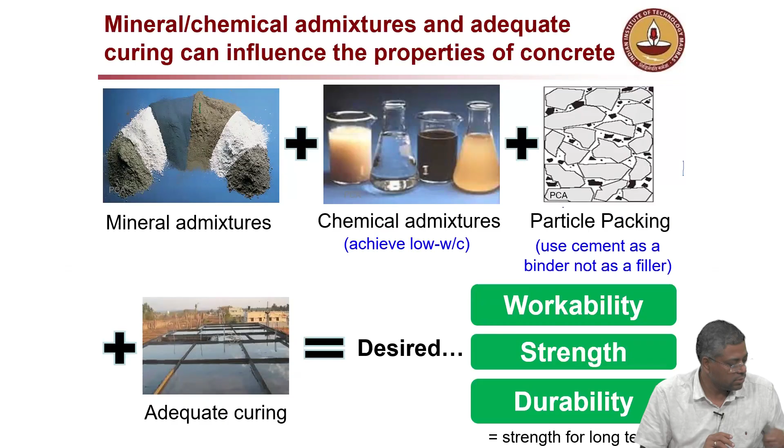If you don't put that much, it will not really show the benefit. I was thinking the sign might be reverse, but no - minimum 25% for fly ash, and if it is slag, minimum 40%. If somebody comes up with a mix with 10% fly ash, please don't call it fly ash concrete - it's too little a quantity to see the benefit.

No, because that also will depend on the amount of water you use, not only the powder material. What I mean to say is, I can have a very high strength concrete - not high performance, just high strength concrete - with less fly ash, if you're thinking only about strength.

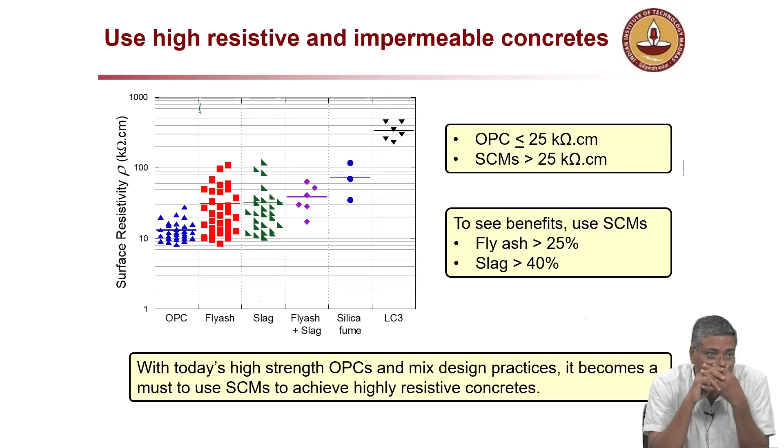So if you put too much fly ash, there are systems with high volume fly ash - 90% and all that - but then you need to properly cure it. A lot of additional effort is required to achieve the real behavior.

For all practical purposes, I would say go with somewhere in the second box on the right side. If you follow that, you will really get good quality concrete. That is one step, then the next step.

Yeah, the fly ash or slag - that is the cementitious content we are talking about. In the code they say cementitious, right? So that is essentially these kind of SCMs.

Now the advantage of this - you remember the service life chart we showed, time versus the damage level? Do any of you remember? Let's look back into that slide - can you open it in the hostel or here? You have it?

You can see here the blue one is the OPC concrete, red is the fly ash. If you can't see things in color on your printout, use your pen and write, or later on you won't understand. The black one, let's forget about for this lecture, but it is also a very good quality cement which is still in research state.

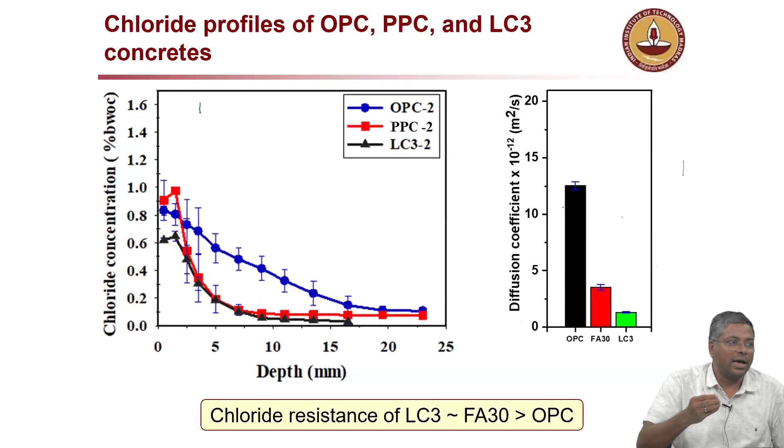What does it mean? When you talk about fly ash or slag systems, over a period of time you can really have high strength and better durability parameters. It may not show up, or it may not show that good properties in 28 days. What it means is, when you cook sambar, you have to wait until the dish is done before you taste and rate it.

I don't know, did I connect to you? You understood? Before the dish is fully cooked, you cannot taste it and say it is bad. You have to wait.

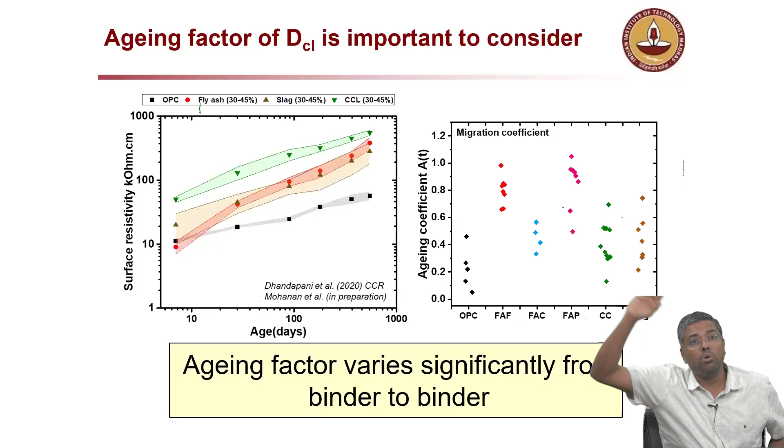Now I'm going to show you an example where, because these are all the actual numbers we got through experiments in the lab, we can use these numbers for a real example. If you have a project and want to show somebody something, you can use these numbers to get approximate values. It's not like saying the steel is going to corrode in exactly 98 years, 5 months and 6 hours - no, but at least you will know it's 90 plus.

That is enough to make decisions. If somebody says material combination A takes 90 years and the other one 89 years, I'll probably go with the second one, if it is less costly. So techno-commercial aspects, both you have to look at, not only technical and not only commercial. Only technical we consider when we don't worry about money. Most of the time we have to worry about money.

So here you can see cover depth is one parameter, diffusion coefficient, which is the speed by which chlorides penetrate. For different types of concretes, you get different numbers. Then the boundary condition, which is chloride threshold, how much chloride you need for the steel to start corroding.

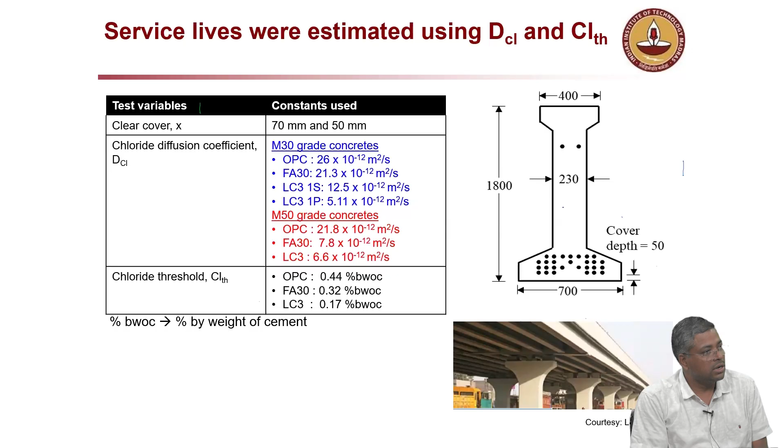So OPC, for God's sake, after this course, if you can avoid OPC, please do. You might say contractual agreement, this thing, that thing, and all that. But if you really want to build durable structures, please avoid 100% OPC, especially for water-related structures. You really need very compact concrete so that water doesn't get in.

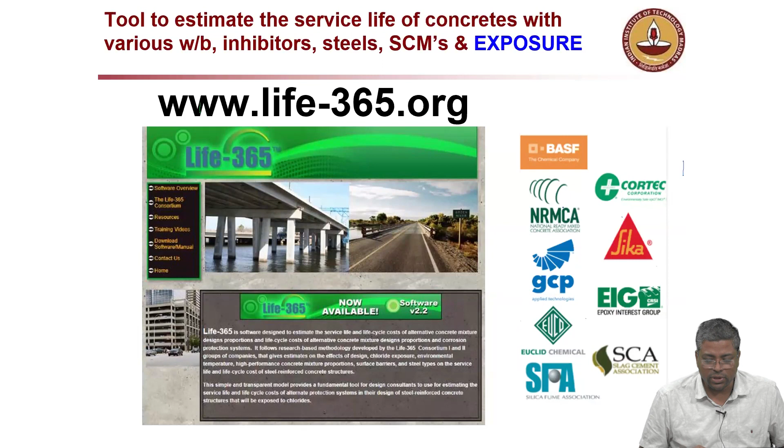Now similar graphs are there for other cases based on this - this is not in your printed slide, I think. So there is also software available, Life 365, free software. You can write it down. You can actually play with different types of mixes, and it's not very complicated, very easy to play with. You can select different types of material - all this can be done in the software. You can just tell what is my mix design, and it will pick its own values. And if you want to put your own, user defined parameters, that's also possible.

And that will also give you probabilistic curves showing what will be the time to corrosion initiation, etc.

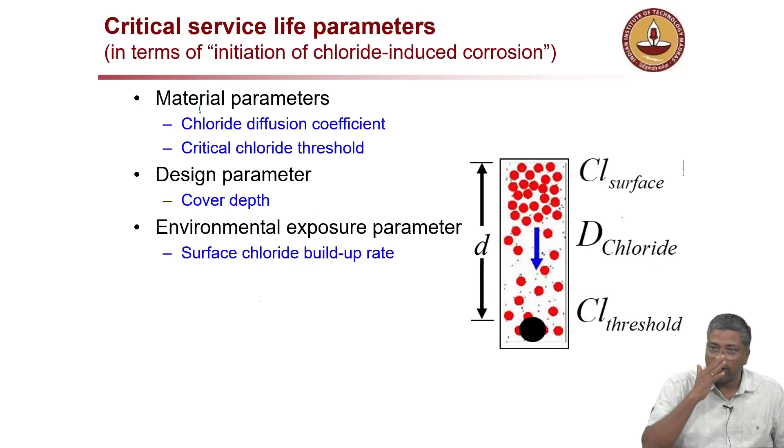This much it has changed for a very small change in X value. Is this clear? I don't want to just keep moving if it's not clear. Is it clear?

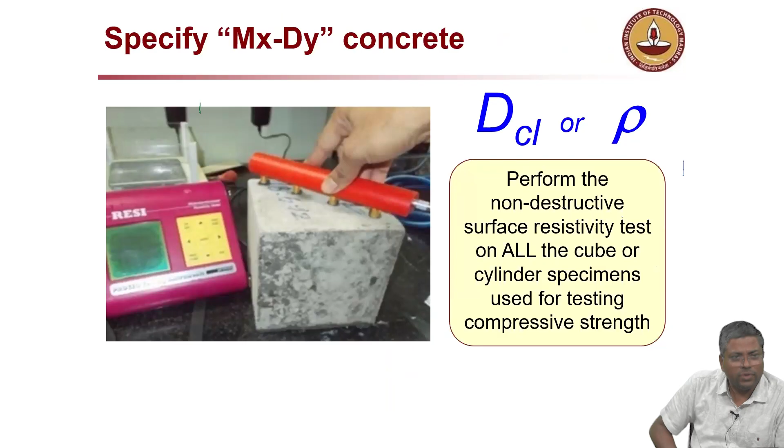Now at the site, you have to really worry about it—how do we achieve that wet condition? So we are saying, like, spray water and keep it wet for 30 minutes or so. That also depends on the type of concrete. If it's very impermeable concrete, 30 minutes may not be enough. If it's porous concrete, 30 minutes is enough. So there are a lot of things—it's not very simple, but we have to define the condition.

Measurement on dry concrete will not help—you will get a very high value, but that's not what we really want. When does corrosion happen? When the concrete is wet or when the concrete is dry?

Who said dry? When the concrete is wet or when the concrete is dry? I'm talking about the moisture condition at the steel surface. You need moisture, right? In the cathodic reaction, one of the reactants is moisture. So if it is very dry, you will not have to worry about corrosion.

So when you talk about all this quality control, what we need is very high resistivity when the concrete is wet, not when the concrete is dry. That's what I want to ensure by doing the testing. So wet resistivity is more important than the dry resistivity.

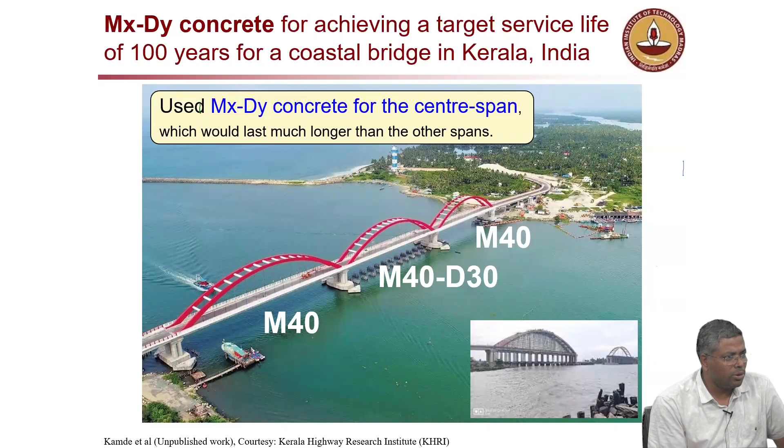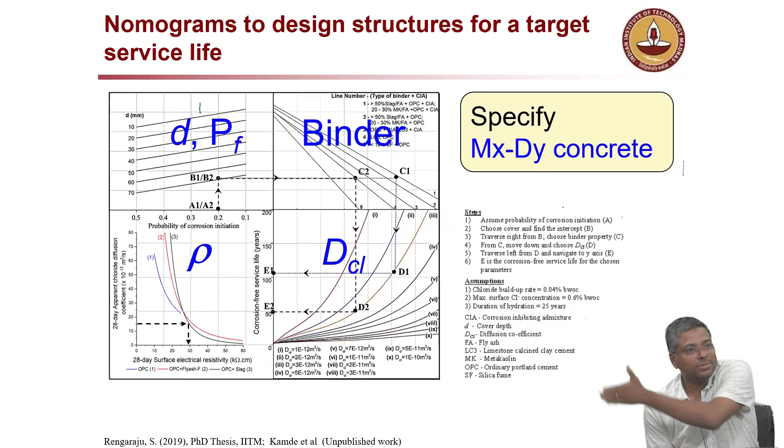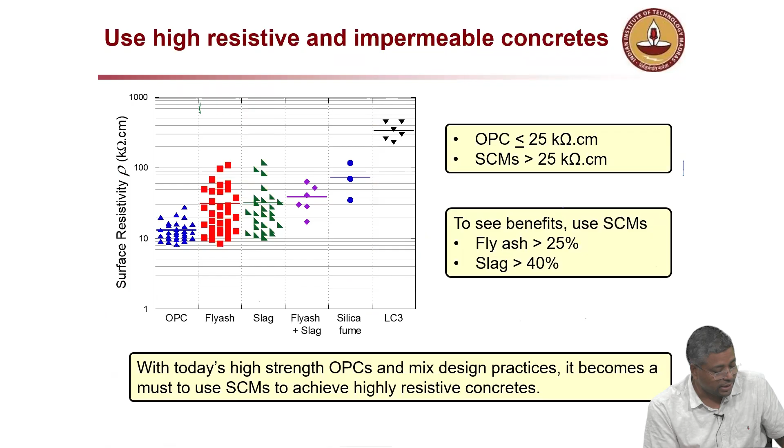But the other two, very, very high resistivity is possible. This one, the blue one, there's only one point which is about 20. That curve, some of the data is from this plot. This is like 5-6 year old data, but the curve is recent.

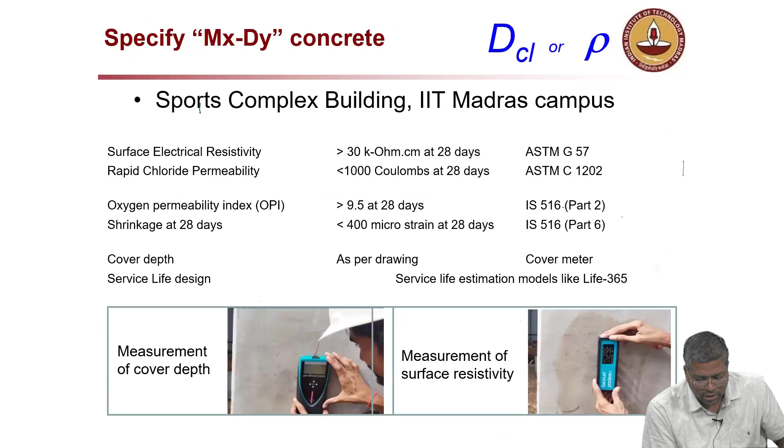Anyway, we have very good evidence that this is how we should do things. Now here again you can see the M40 design. The blue-green one is the M40 D30 design. So look carefully at the mix design, OPC1 and OPC2.

I'm going through this in detail so that you won't forget. OPC1, OPC2 - how much is the cement content? People from the field, have you seen mixes like this? Nowadays we see a lot of mixes with very high cement content.

Sorry, I have this animation and it's going back and forth. See, when they were doing this, I said we are not going to allow anything. In the beginning I said try with 390, that's okay, but not 400. But then we insisted, and still at least we could do this with 409. That's the PSC mix, 410 we can say. So it is doable, that's what I'm telling you.

And I'm not talking about a classroom project. This real bridge, on this bridge, the cement used was 410 PSC. So you have to actually use admixture technology well. Most cases we are not using it. You have to do mix design properly. PSC is Portland slag cement, 70% slag.

Yeah, it's a pre-blended mix. So if it's either PPC or PSC pre-blended, the company will try to maximize the amount of slag or fly ash. The point I'm trying to make is that you don't need 600 kg cement, you don't need 500 kg cement, 400 is enough. The trick is to have the aggregate gradation properly done and use adequate chemical admixtures.

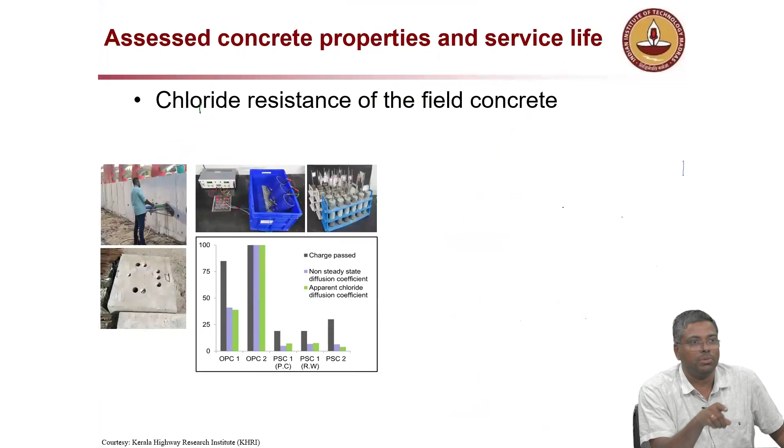That's where the trick is. And you have to do it at the site with your kind of aggregates, your kind of cement, your kind of admixtures - compatibility between cement and admixtures, all that has to be looked at. Is it clear? Now, we also did testing on site, because usually people say, okay this is our laboratory study, site is different. We did actual testing on site. This is proof.

So actually I wanted to test these slab panels for 2-3 years. But unfortunately, the minister came and they dumped this thing into the ocean - this panel - because they wanted to clear up the site. Literally, they dumped it into the ocean. Big loss, I would say. Anyway, so here you can see what is the service life difference between OPC and PSC.

How many times? 4 times. So I really wonder why we don't use it.

You can get better strength, you can get better durability, but still we go by pure vegetarian restaurant, pure OPC. So please use this data wherever you want.

The paper was published last week. It's available online, or I can email it. It's available now, online. Full details of this project are there, because people always ask, where is the field data?

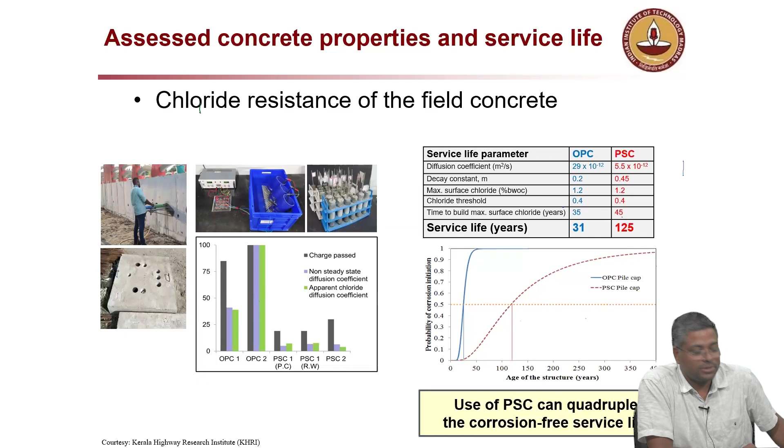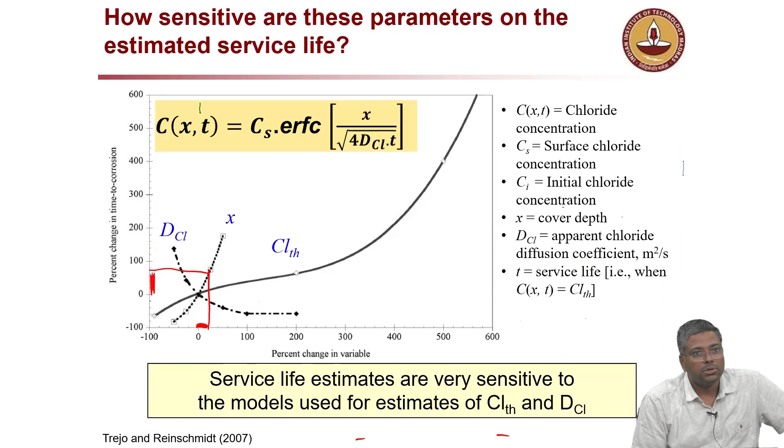So in this equation here, X is the cover depth, and that's the most sensitive parameter. So if I increase it... but I cannot keep on increasing cover, you know why? Because it will start cracking. I don't want to do that, but at least I should provide what is allowed.

So I think you should start penalizing people if the cover is not adequately provided. And usually there is resistance to measuring cover after the formwork is removed. Do we measure cover depth? Unless there is a problem, we don't.

Why? You don't want to know. It's sometimes better not to know the problems.

I have directly experienced this, that's why I'm telling you. On projects where we say go measure cover depth, people will do all sorts of things not to measure. The reason is in IS 456, it is given that if the cover is not this much, you can actually...

There is a very strict guideline given on what the cover depth should be. If you say 40mm cover plus or minus 5, I think that's allowed. So if it's beyond that, then you are in trouble.

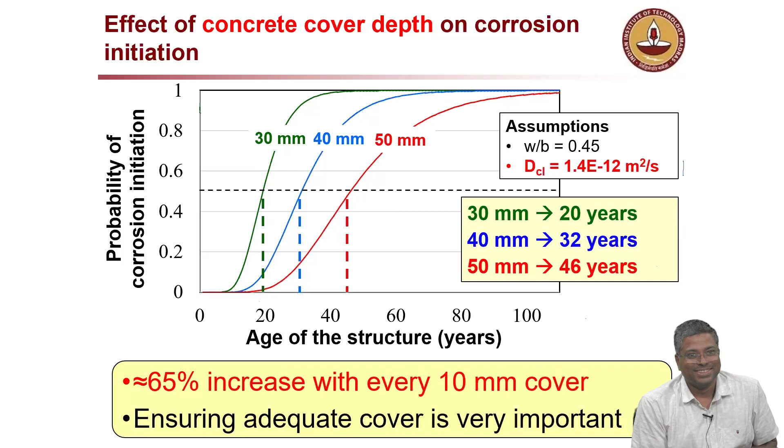Once the data is collected, you have to take action on it, right? So people don't try to collect data, but let me see if I have that slide here. My suggestion is go with this: tell people that I'll come back and measure. Write it in the contract document. Then they will ensure everything is right.

So go back to this example from a project in Chennai. About a 6-7 year old building. The building does not exist today. It was 3 big apartment complexes, big buildings. I think about 500 families were staying there. It was demolished recently.

Cover concrete is the flesh around the bone. Steel is the bone. Shirt is the paint, skin is your plaster. I'm not saying you need skin, but this analogy is okay. And then you have flesh, which is the concrete. Then you have steel, rebar, which is the bone.

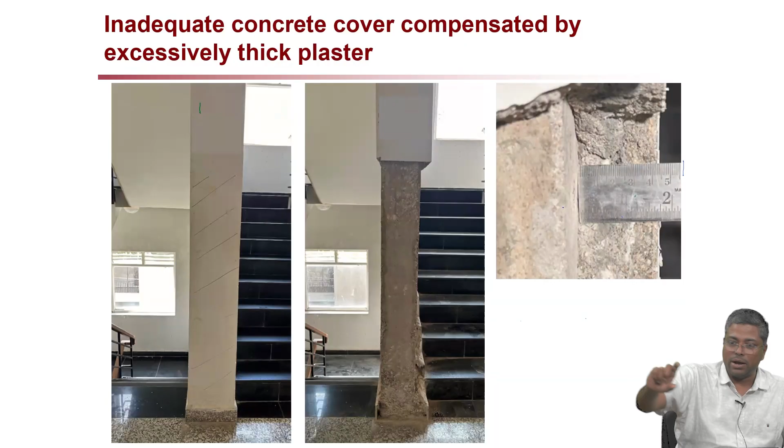Now what you observe here is the bottom face, about 1 meter from the base of the column. You can see that marked region in the middle drawing. See, all these things, if you don't write or mark on your printout, it is not going to be clear for you later. You should write it down. Maybe I should let you write before I go to the next slide, and please write on the printout, not on your other book. First day I told this.

Now what you see there - we opened at that region and we found corrosion. This is very common, that's why I'm going very slow. Where is the corrosion? On the bottom, about 1 meter. Any structure you go, you will see this problem. Most places nowadays you will see this problem.

Very clear indication that concreting is not done properly - that kind of shear wall you see there, or a concrete column, a thin element. Concrete is not placed, it is not compacted, so it is very porous, and every day you mop. That's a problem.

So where does the water go? It has capillary rise. So that column will get water every day, whether it is summer or winter. If you are mopping, that's going to get water. And it gets enough oxygen also, because it is not a submerged case. So it's an ideal case for corrosion to happen.

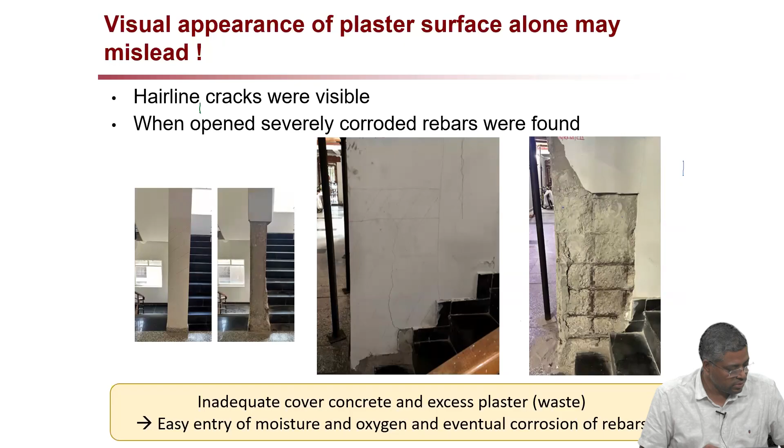Believe it or not, this structure, within 7 years of its construction, was demolished. All that jacketing is not a remedial measure. Jacketing is only a remedy for strength, not for the durability part. Only strength - so I don't want to mix these up.

I'll talk to you later on that if you are interested, because I'm not talking about repair practices here. Since you raised this point - jacketing will give only temporary mechanical strength. If there is corrosion happening, you have to first stop the corrosion before doing any strengthening. One is electrochemical repair, the other is strengthening or structural repair. One deals with the chemistry, the other deals with the mechanics. You have to have both.

What do you observe from this? Plaster is of no use. Here that plaster is fully carbonated in 8 years, whereas the concrete is not carbonated. Same way, when you talk about chloride resistance, plaster has absolutely no role. When you talk about carbonation resistance, plaster has absolutely no role.

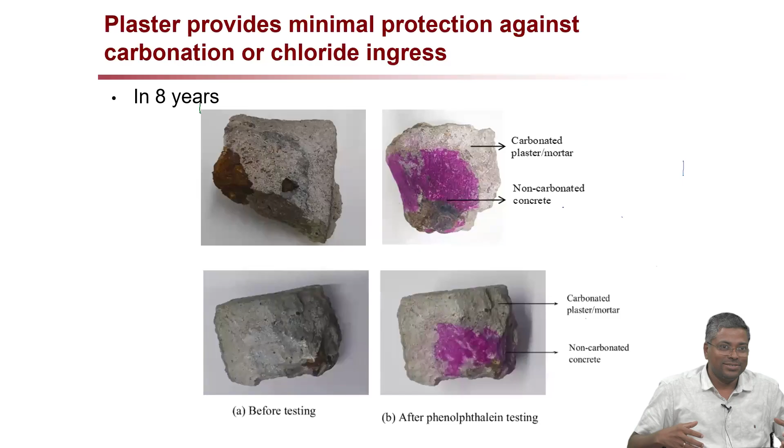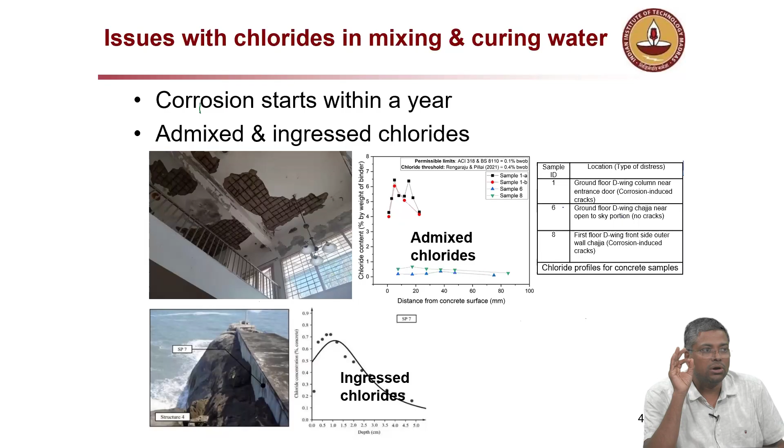Now this is another one, from our own campus. Architects give this nice pergola design, but we engineers are failing in constructing it properly. This will be like 60 mm thick, and then 1 or 2 meters, whatever, depending on the design, at least 1 meter high, and then you have to place this.

So these are all cases where we can actually go with precast. You make small panel elements and then just stack it there, but that work you can do on ground. The advantage of precast is everything you can do on ground except the connections, and when you do things on ground, knowledgeable engineers can actually check.

We can't expect the labor or construction worker to check every cover - they don't know, you can't blame them, and they get less salary than engineers. So you are supposed to be checking that. You take more money from the company, so you are supposed to build better, and take more responsibility also. This is just one of the hostels on campus, people here can recognize which building it is.

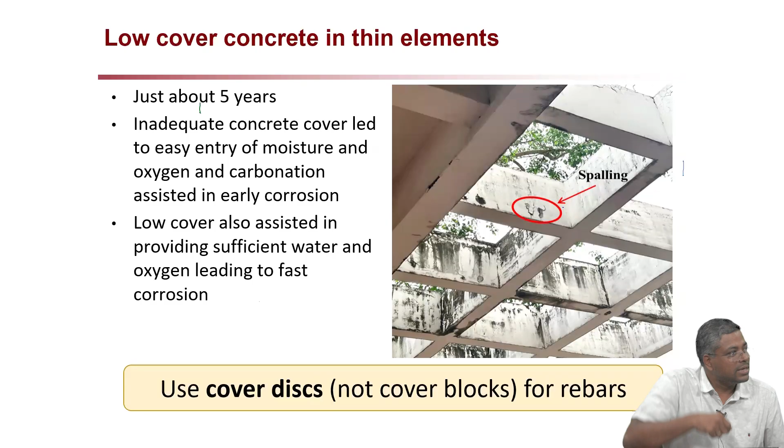So you can see the cover, just around 5 years. Anybody staying in this hostel? When you go there, you see how the cracking is happening on that.

And when they start leaking - nowadays we have this practice of covering up everything. APP membranes are available, you just put them everywhere and close everything, so I don't want to know the problem until it is too late. So that is something which I would recommend: as much as possible, keep the concrete element exposed. Don't put a cover on top of the concrete again - it is not required, it adds budget, you need more money for that, and it doesn't give any protection, rather it creates a negative issue. Why? Because it will hold the humidity inside, it will not allow it to dry, and even if somehow water gets in there, it will hold it there.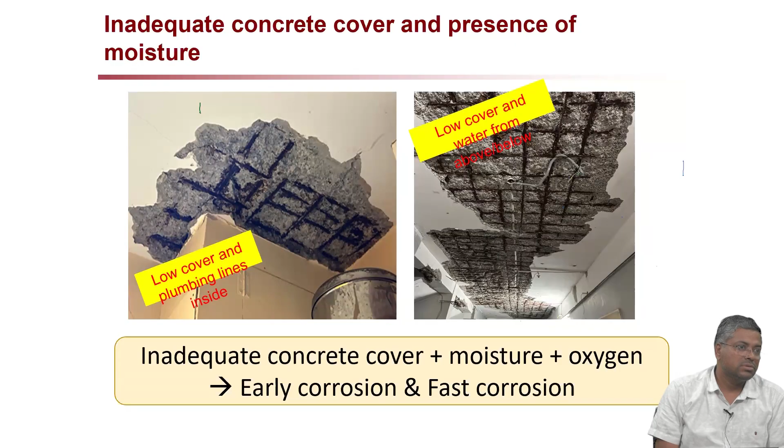Now, cover block. The other day, Justin, you have it? Yeah, so you can see here, there are cases where plastic cover blocks are used. Now it is not widely used, but it is still there in the market. Please don't use plastic cover block.

Okay, why? Any comment? Think. See, plastic does not bond with the concrete. Now you are providing a plastic cover block. I have my bar here, my steel bar is this, my hand is the plastic cover block. Now what will happen? Water, or more oxygen, air, everything will have a direct highway available to the steel bar. Now this side of the concrete will shrink this way, and concrete on this side will shrink that way.

So you will have a very good crack for all the deleterious elements to reach the steel. Now you have a fine, it is like cracked concrete, if you remember, very small anode, very large cathode case. So in the long run, it is not very good.

So what we are recommending now, and also this second one, it looks very good, but look is not what we really are looking at. Now Umesh actually found that these cover blocks, about 1 to 2 mm of the entire surface of the cover block, is already carbonated by the time you put it in concrete.

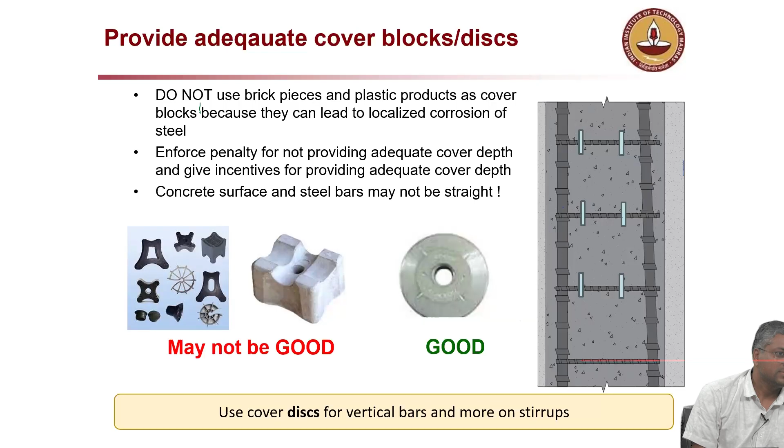Actually, a good designer will tell cover required for the stirrups. I think it says nearest reinforcement - not now you are changing my vocabulary. Not longitudinal, I said not. I think it says nearest rebar, that's what it says. Nearest, okay.

So for horizontal elements, or if the rebar mat we are talking about, then you can go with these kinds of blocks, no issue, you don't need a circular cover disc for that. So the title says cover block or cover disc. Okay, we usually use only cover block. So can we add another vocabulary - one more, add another vocabulary, cover disc.

Okay, now I remember one more concept. When you want to test, let's say you want to test a durability parameter or something on a concrete structure, if you want to test compressive strength, you will need a core. Okay, what will be the typical cover depth?

Typical cover depth is 30 or 40 mm. That will not be sufficient to do a strength test, you need a deeper or longer cylinder, so you go behind the bar and core more. But if you want to test a durability parameter, you don't need that much. You only need a cover disc, not a core.

A disc from the cover region is enough, not a core. Let me tell you the story of how we came up with this. One of my students was trying to test the carbonation depth in Chennai Metro columns. Over a year he struggled, but nobody was giving permission because they didn't want to take a core.

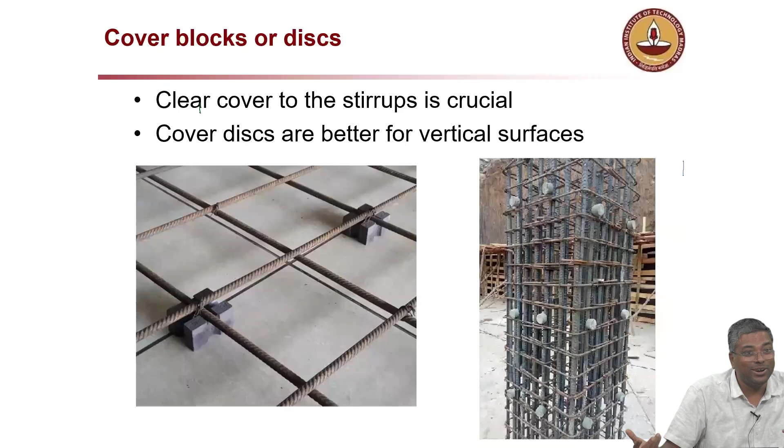But again, if the structure is in bad shape, it's like if a doctor says I want to test bone marrow, you have to give it. You cannot say I'll only give blood and not the bone marrow. So it depends on the case.

Now, how do we actually handle the cover depth issue on site? In the contract document, we can say that we will come and measure the cover depth after formwork removal, before plastering. There is equipment available which you can use just to scan, cover meters are everywhere. You can say, I'll measure like 100 points at random depending on the structure, and then based on the number of points which pass, you can figure it out.

If you write this condition in the contract, the contractor will ensure that it is met. It's only a matter of putting a watchdog. All these things we talk about, if they come into the contract document, things will happen. So where is the problem? The problem is in writing the contract document. That cut and paste business is something we have to really work on.

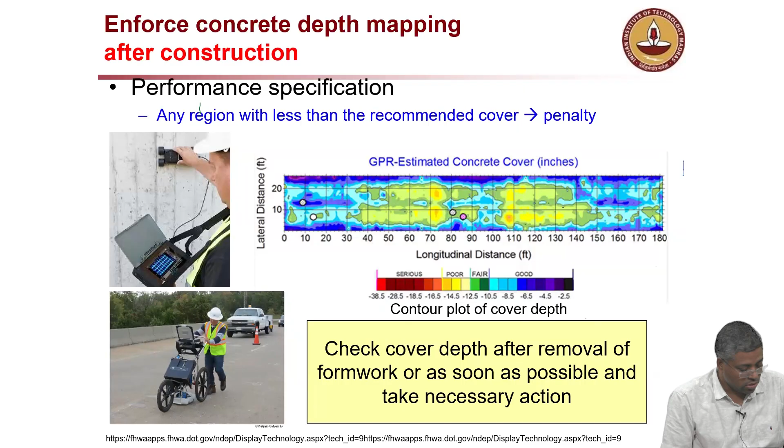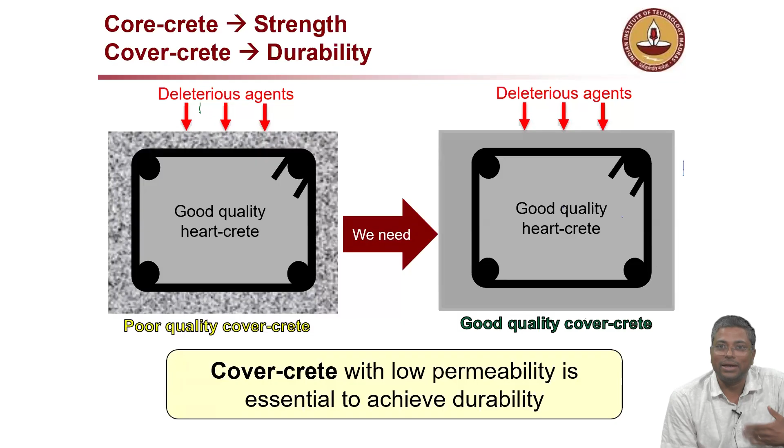Yesterday, well Saturday, we saw the precast shell. This is the best thing about that: you have very good quality cover concrete. Even if you mess up at the site, it's only the heart-crete which gets messed up, but the cover concrete will be very good in that case. In BG Shirke's project, all the outer concrete is very good, and they also provide proper cover because it's all mechanized. You don't have to really worry about it.

So you can employ a person who will ensure compaction, cover and curing - three things. Penalize if it is not met, incentivize if it is all met. Okay, in which way we can.

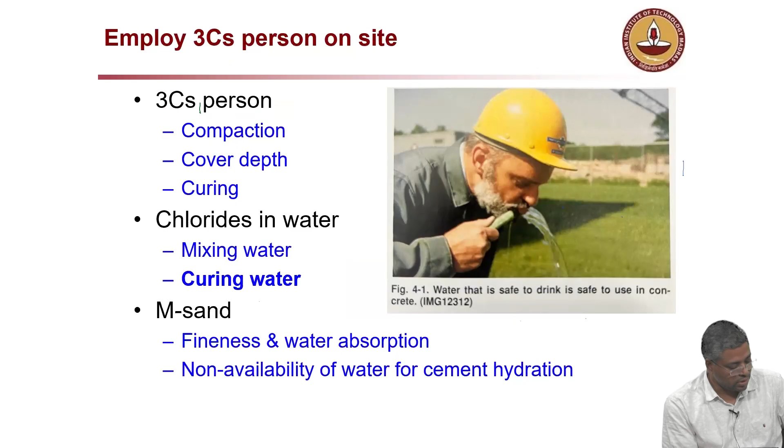Now another concept is a birth certificate for concrete. When babies are born, before you go out, they will give you something, right? What is the test which they do? Blood test, which group, they'll write it on that, and whatever other tests are there. So essentially you're certifying that there are no abnormalities and all that.

Now here, can we also do it a similar way? One set of parameters for mechanical properties, a set of parameters for durability properties, and then we can say if you have all these things, then your structure is good to go. But how many places do we actually practice this? This is nothing new, if you look in the FIB document, it's there - birth certificate, you can Google it.

But we need to bring it into our construction. Now we did this for the sports complex, we actually did it. I'll show in the next part - it's not called a birth certificate, but we did it for that structure. So mechanics is important, chemistry is also equally important.

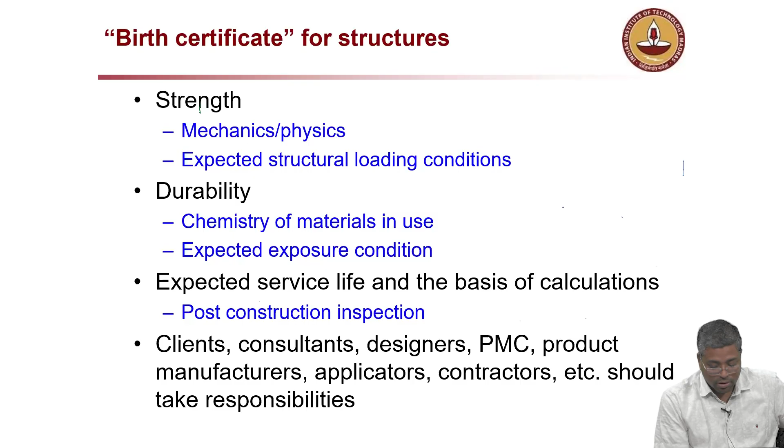You are asking something. Okay, okay, rest of the things you read, and summary I think next.